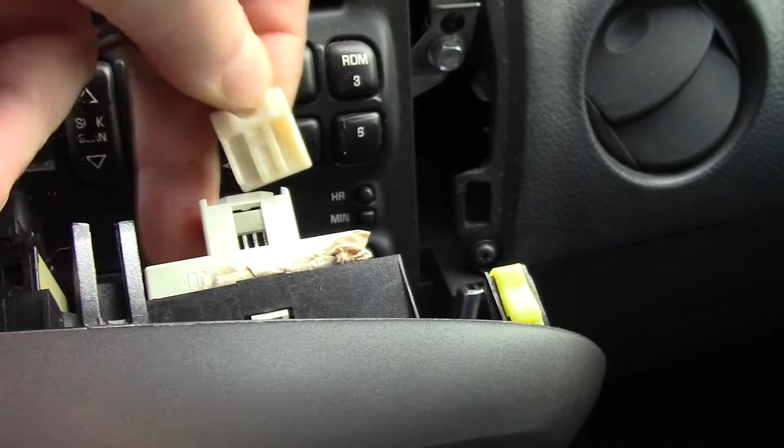There's one. This isn't easy to do one-handed. There's two. There's three. And I got a fourth one. Maybe I get this fourth one, hopefully. I don't feel the release on it. There it is. If I can get it. There it is, okay. Alright, I got it off of there.

There's what we're left with. And there's what that is. Hopefully I'm not making you guys too dizzy.

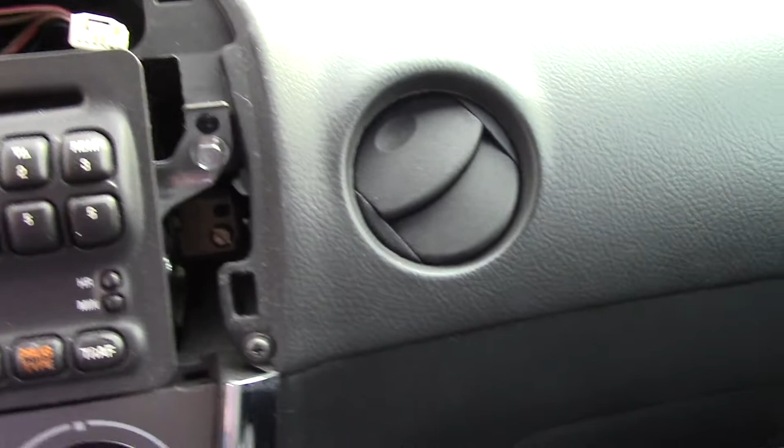Alright, so it looks like this radio has a screw here and a hex screw down there, and just the opposite over here, a hex screw here and a screw head there. Probably over the years, well, I know that for a fact. I actually gave this vehicle to my daughter quite a few years ago for her to be driving around, and she wanted an aftermarket stereo in it, and she did it herself. And it looks like when I bought the car back from her, she put it back in and got her screws reversed apparently. But that's okay.

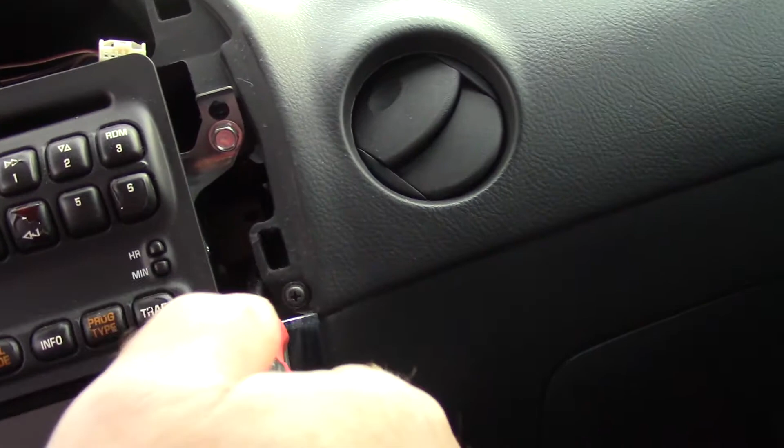So let me see how tight these are, and if we can get them out. Well, that's not bad, that's not bad at all. Okay, what about the one inside there? Well, that's not bad either. Okay, yep, screw fell out. And it's on the magnet, but it just fell on the floor.

So we're going to go back to this one. So this backup camera that I bought is wireless in the fact that it doesn't have to have a wire going to the camera itself. The camera is apparently wireless.

And that's the wrong one. Let's see, I got this one. Nope, that ain't the right one either. Alright, so I don't have the right wrench out here. Nut driver, that's what that's called. I don't have the right nut driver out here. So let me go get the correct tool and I'll be right back.

Okay, I went ahead and brought the tripod out here, minimized its size and brought it out here. So let's see if we can get this thing out on camera, and that is the right one there, so that's cool, that's good for that.

There's that one. Let's see if we can get this one. Alright, that's that one. I'll get my fingers on it and get it out of here without dropping it. Alright. And so this should pull out, at least so far, I would think. Yeah.

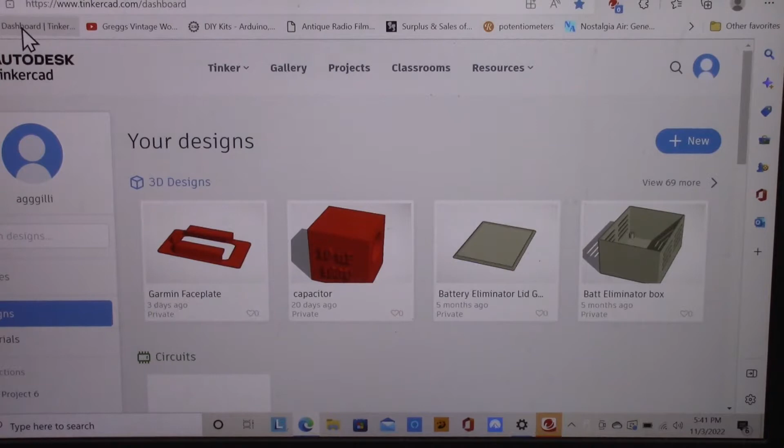Okay, I thought I'd show you guys how I came up with the faceplate that I printed off for this Garmin retrofit on the dash of that 2008 Pontiac Vibe.

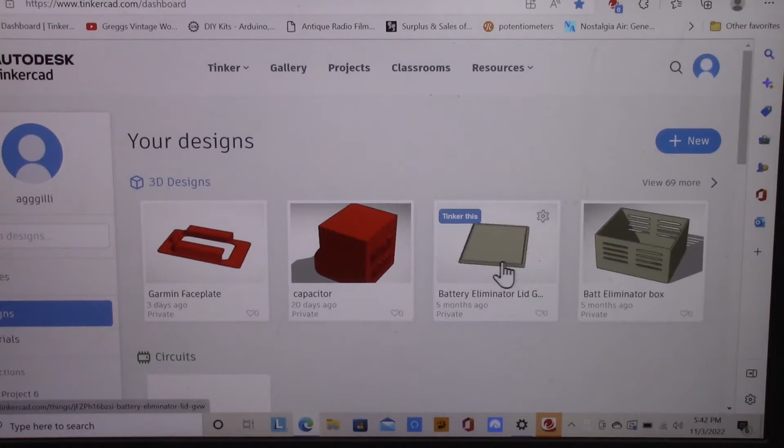So I went into my Tinkercad program, which I got lots of stuff in here. There's that little capacitor holder that I had made for the farm radio, and there's the battery eliminator lid and battery eliminator box for the battery eliminator I did, as well as a lot of other stuff I got on here.

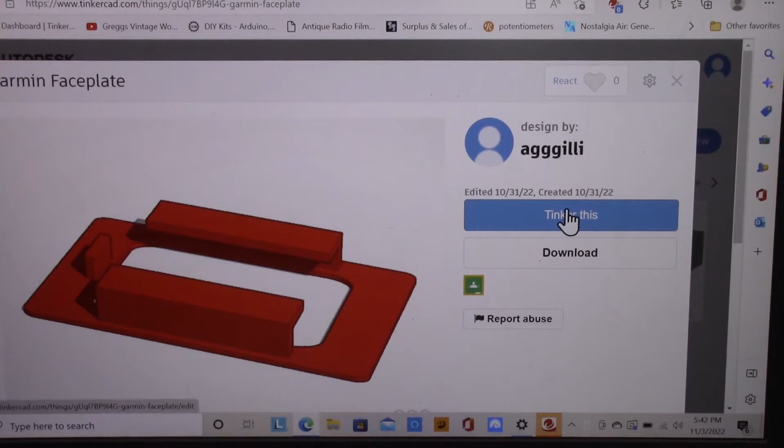But this is the actual faceplate, so if we click on that and go to tinker this, then we can take a look at it.

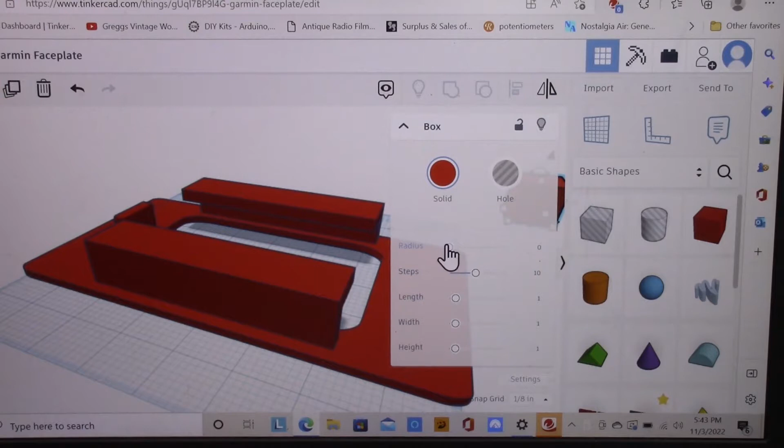Basically, I know Doug has shown you guys a lot of this stuff before, and he's definitely much better at it than I am. But you can create whatever you need based on, just like the box is what I start out with. I start off with a box, and then it lets you select that box and do something with it. If you want to make it rounded around the edges, which is kind of what I did on this one, then you move the radius around and it'll make it rounded.

So if you look at this block now, which I got it not really where you can see it that well, but we can move it into the forefront so you guys can see it a little bit better. Now I've got to raise it up because it's in my project right at the moment, and we didn't necessarily want it there, so we'll just raise it up so you guys can see it.

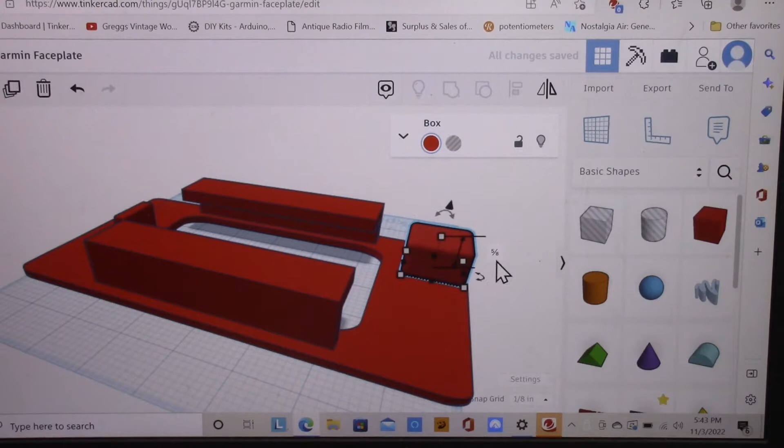But then you just click on your various dimensions. You can put this in millimeters or inches, I typically use millimeters, in this case I used inches. But say we want to make this thing thinner, then we can crunch it down. You can see how much you're crunching it down by over here. This particular faceplate I made 1/4 inch.

Maybe I used 3/16 inch, I don't remember. Anyway, but that's how I did it, and then you just resize it, click on there and change your dimension, whatever you want it to be. If you want it to be 5 inches or whatever you want it to be. Same with the width.

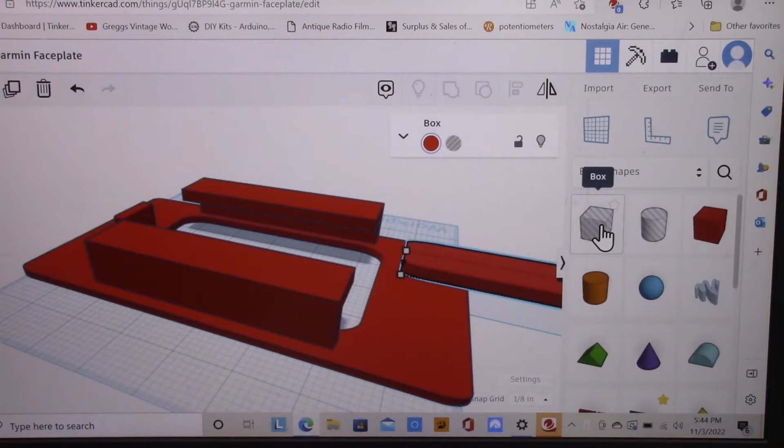And then when you get what you want, then you can grab another one of these. These are actually the items that make holes in stuff. So if you're gonna make a hole in that, you could do that, and you could split it in 2 pieces doing it that way too.

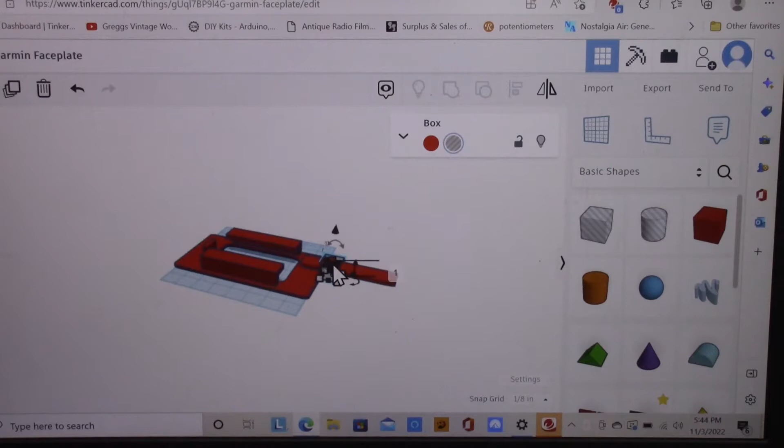Bring it out a little bit so you guys can see it a little bit better. I usually make this taller, and I don't know, we just make this smaller. Let's just say 0.5 on this, and then 0.5 the other way.

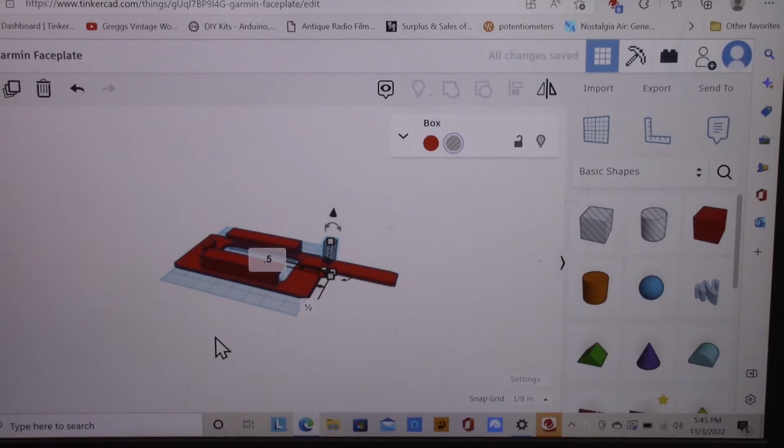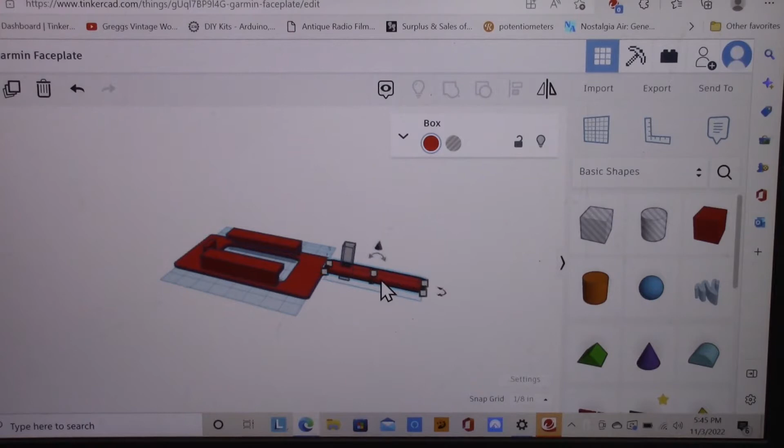And then you can just push it down into wherever you want your hole to be. You can move it around with your arrows, but you got to highlight the piece first. Once it's highlighted, I can move it left or right, up or down, however we want to do it. I'm going to move this away from the project so I don't grab my project, and we'll just make that square hole in there.

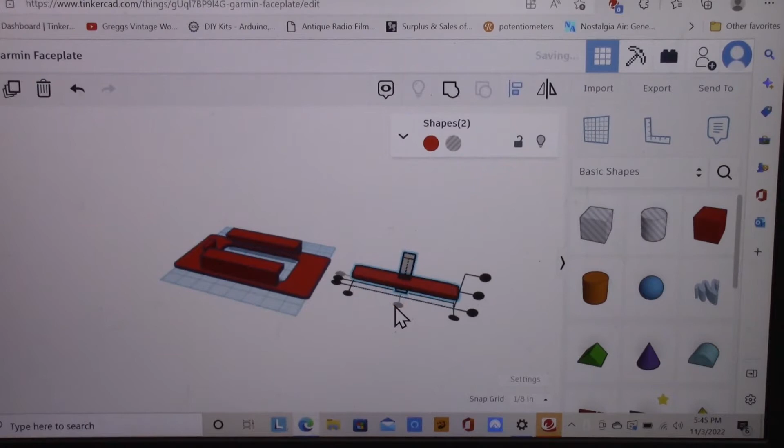Like that. And then you just come over here and highlight the thing. You can either align it in there and put it where you want it, or if we align it, say we want to center it, click it there, center it in the other place, click it there, and then we can put the hole in. Highlight it again, come up here and group, and now you got a hole in it.

Well, in my case a notch, because it obviously didn't have it quite centered. But anyway, you guys get the idea. And then if we want to just delete this thing, we come over here to the can and throw it away. But that's basically how I made this.

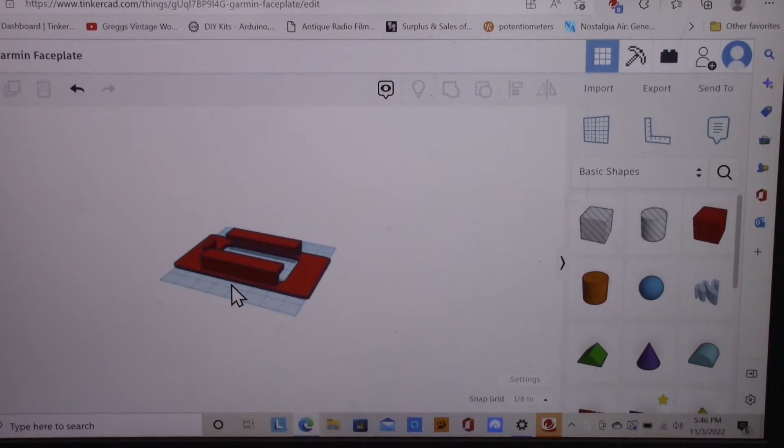Started off with square blocks, made them rectangular, made them the length I wanted them, and as far as the actual bracket itself, I had made some measurements of the actual bezel piece that goes in the car, as well as the actual component itself, the display for the backup alarm. So that's what we got.

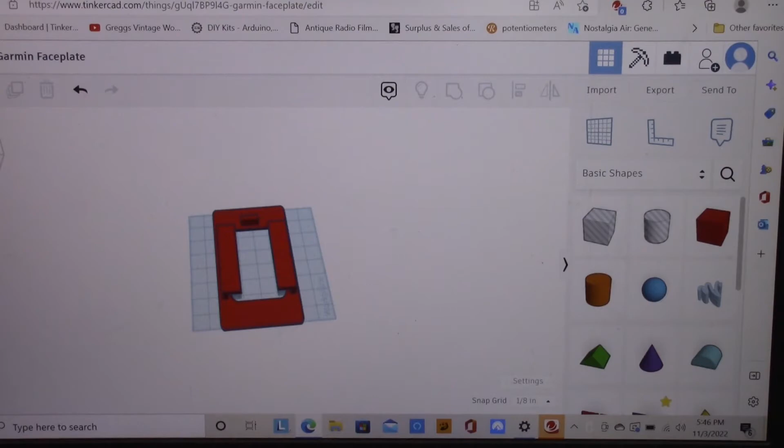And then once you have that, then you can export it, which I exported into my Ultimaker Cura program.

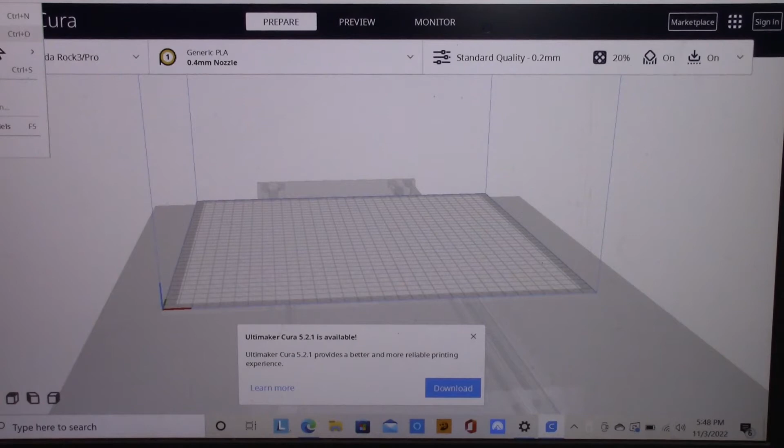So here we are in Ultimaker for my Mingda Rock 3 Pro, and I'll just come over here to File, and we'll open Recent. It's going to be this one. Open File, Recent. Wait a second, did I get the right one? We'll go with this one. I'll open it, and there it is.

And now once in here, you could resize it if you wanted to. You can rotate it, however you want to do it. But basically, it's just pulling the STL file that I exported from Tinkercad down.

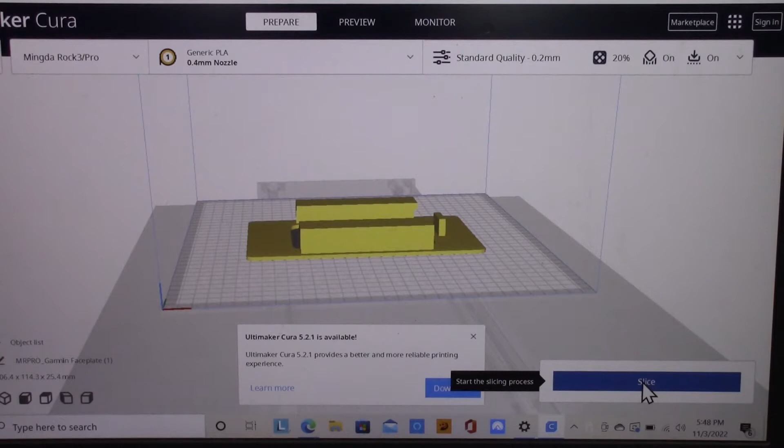And if you want to see how long it's going to take to print this, then you would hit Slice. And it's going to say 7 hours and 27 minutes. And that's approximately - it actually took a little over 8 to print it.

And you can go in and change your settings here to make your infill smaller or more, so you can run this thing solid, or you can run - I ran 20% infill on it, but that's why I made everything as thick as I actually did.

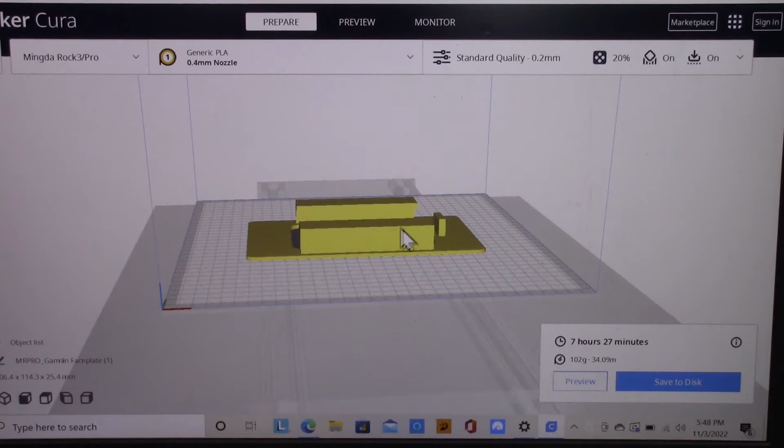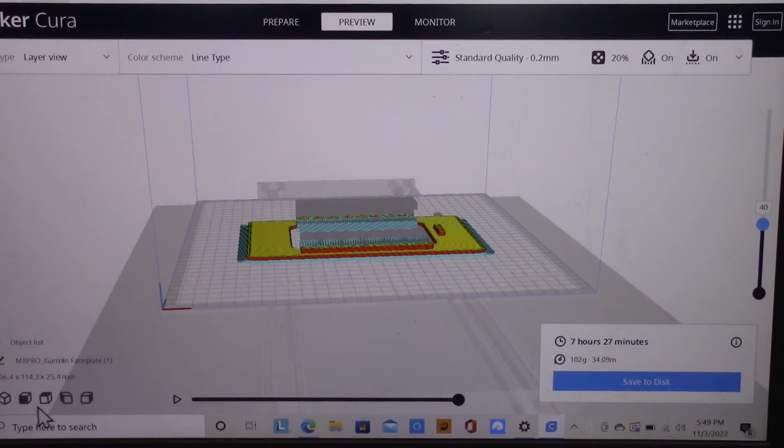And then you can preview this if you want to see how it's going to print. I can come over here and it kind of shows you layer by layer how it's going to print this thing out. And I had supports in there, so if I give you a top view straight down, you'd be able to see there it is at the top.

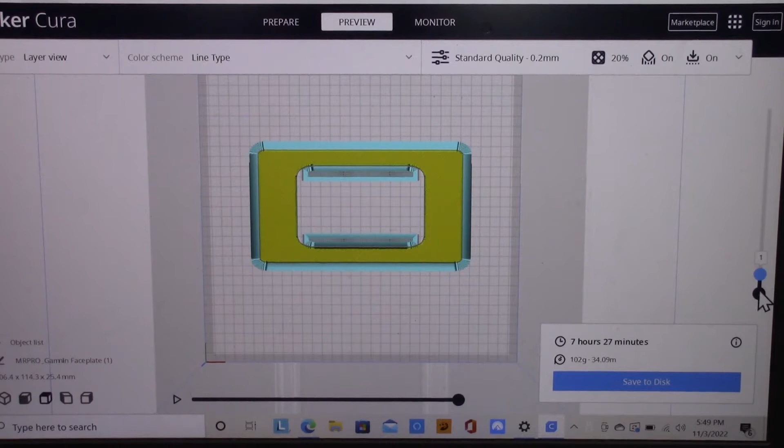And then because you can't print in the air, at some point, like right about here, is where the supports began. Well, they began at the base, but okay, so then if you start at the very beginning, it starts printing all of that out, and then it works its way up. So that's how it works.

Anyway, I don't know if that bored you guys to death or what, but that's how I made it. And now let me show it to you.

Now I've already slid the device into it. It's still got the protective paper on it, but there's the faceplate. I think it turned out really nice.

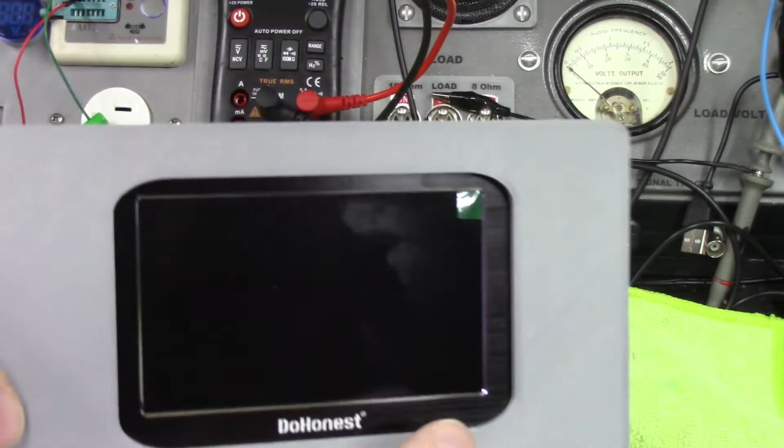And the way I measured it, I wanted to be able to slide it in and have it hit a bump stop that would center it, which is what that is, and that these would apply enough tension on it that I could slide it in and it wouldn't move, but I could remove it easily if I want to. So that's what I did.

Here's the power wire, and this is an antenna. Which I'm going to play with this antenna.

I'm either going to just go straight back into the receptacle area that the radio was in and see what kind of reception I got, or I may have to bring it straight up and bring it out the top of the bezel, but we'll figure it out. But that's it. It turned out really nice. I was very happy with that.

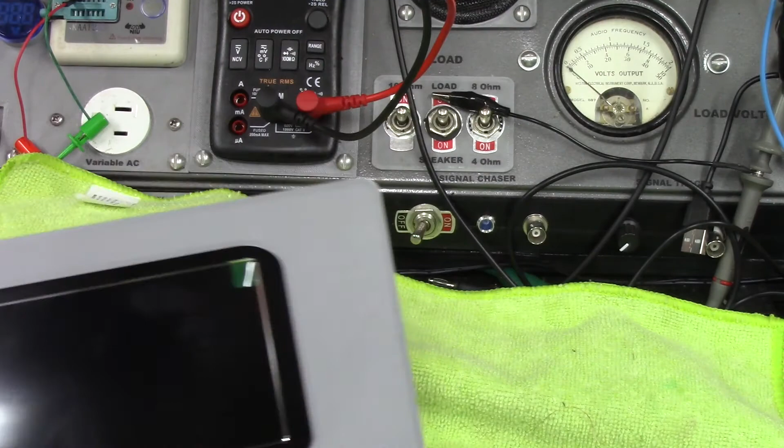So now what I got to do is get this to fit into the actual bezel itself. So I'll show you what the plan is for that here in a sec.

Okay, so here's the bezel, and throughout this bezel there are little raised supports that are in here, and on both sides. Let me back you out just a little bit, might have you too close.

There was one here, a big one on this side, and another couple big ones over here. So what I did was I made the faceplate so that it would actually go underneath here, but I would have to make a slot, same here and here. The idea is I'll make the slot, get it down in there, and then mash it down until it pops in underneath these slots.

If I can show you what I'm doing here - I just had that, I busted that off. I tried to glue it back on with super glue, but apparently I don't like super glue, so I'm going to have to use something else. Same with that one, it got a little cracked when I pulled it out one-handed. Not fully off like this one is, but I'll have to get those back on. I'll find something that works.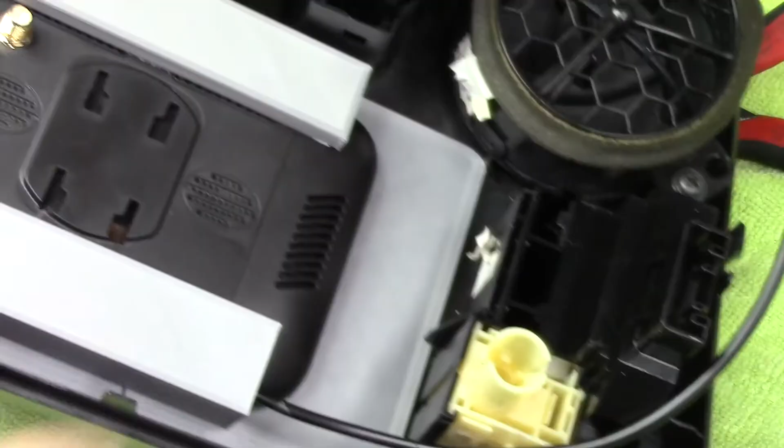So I'm going to notch these, and then we'll get that in there. Okay, so I got this end right here under that tab right there, if you guys are seeing that - that tab right there. I've cut these down at an angle right here and a notch, so hopefully if I've got the notch deep enough, I can pop this down in there without breaking something. If I don't, hopefully I won't break something. I'm going to mash it down right here and see if it'll pop in place.

And it popped in place. So now I've got this tab and this tab holding this side, and this tab holding this side. Let's see if it's flush at the front. And nice and flush with the front - perfectly flush with the front.

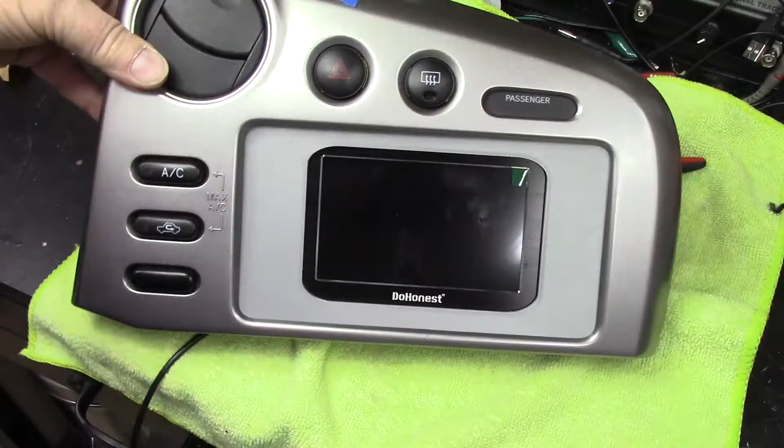I'm pretty happy with that. It actually turned out real nice - factory, it looks factory, yeah. I can pull that protective paper off once I get in the car, and those fingerprints will be gone. That turned out better than I thought it would. It's definitely flush all the way around. Looks good.

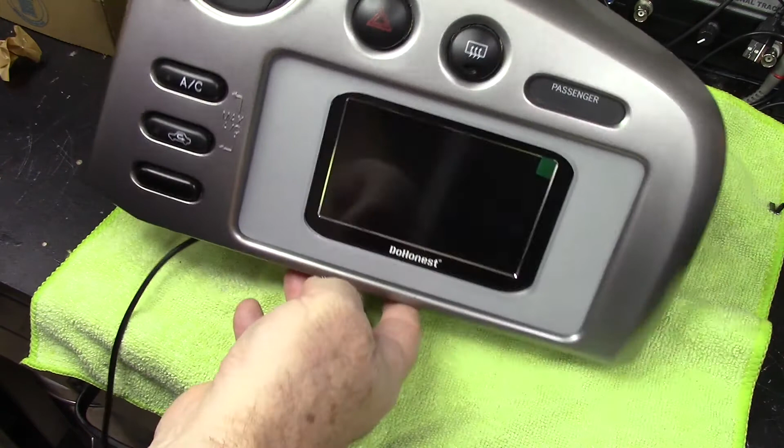Alright, next step is to get it wired up inside to some power and snap back in place. And then we'll take a look at the actual camera mounting and how that all goes together.

Okay, so I got the dash back in, and I didn't show you the wiring that I did because ultimately I didn't do any wiring per se. When I got the schematic for the plug for the radio, it didn't have a switched power to it. It had a power and a ground because the radio itself has a switch in it.

I decided I was just going to go ahead and use the cigarette lighter to power up the actual monitor piece, and then the actual camera piece is on the back of the vehicle - I've got to tap into the backup light. I've got the Garmin in place, it went in nice, I custom wired that. I actually have a little grommet in my bezel for that, and the wire nice and shortened. It's in there really nice and works really well. There's a cigarette lighter - so this is the plug for the Garmin.

What I thought I was going to do is go ahead and wire the Garmin and the backup monitor into the same cigarette lighter harness, but I couldn't do that. And the reason I couldn't, that's the one for the Garmin - it actually converts 12 volts to 4.5 volts. Apparently the Garmin runs 4.5 volts, and this monitor runs 12. So what I've decided to do is just go ahead and get one of those dual port cigarette lighter ports, and I'll plug the monitor for the backup camera as well as the Garmin into that one, and then they can both be plugged in.

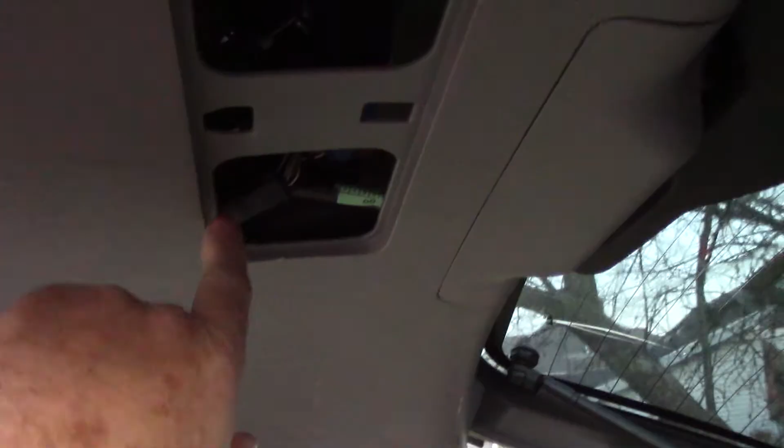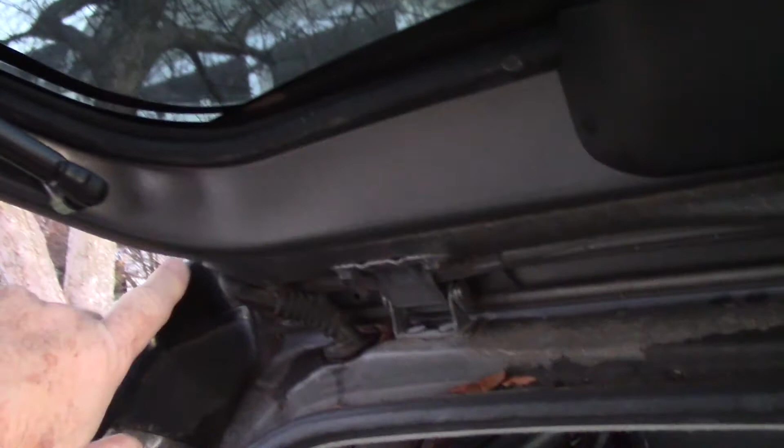It's probably dark in here, sorry for poor lighting, it's dusk outside, but the wire is fed in here right now. It's about a foot long, I can reach it. The other wire that plugs into it, the extension wire, will have to come up through here and up through the frame, down into this little loom here which I'll have to pull out, down into the frame, feed down this rail here.

I'll pull this out, and then I'll tap into the tail light wiring once this panel here is out, which only has 4 pieces of hardware - here, here, there, and down there. And once that's out, that piece will come out.

I'll pull this piece off right here, so I can get into that better. And we'll feed that wiring down there. I'll tap it into the backup light circuit, and then it should work. And then I'll bring it back and show that to you.

Alright, so I figured I'd show you my backup camera. Now that the install is done, I got the wiring done. I got the wire run exactly through the hatch like I knew I had to. I had to take most of the trim out inside the back of the hatch in order to do it, but I got it done.

So let's go ahead and start the car. It flashes up the rear marker for a minute if it doesn't see a signal. Then I'll put it in gear, in reverse, and there it is. It just popped up. See if I can get you a little closer. It's a very crisp, clear picture.

I'm very impressed with it. That's the houses across the street in the back of my driveway. So, yeah, it works good.